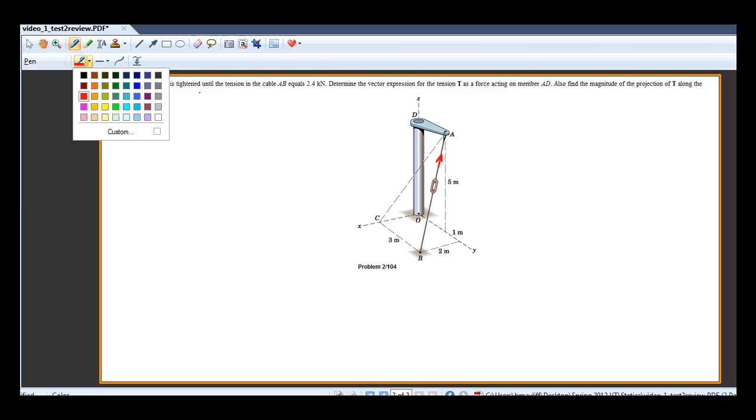This is my second video on statics. This is force systems and a three-dimensional problem. So we have tension is equal to 2.4 kilonewtons, and that is on AB. So I'll just add that in to the free-body diagram, sort of, there. And they want this tension as a vector expression. So that means they want it in I, J, and K.

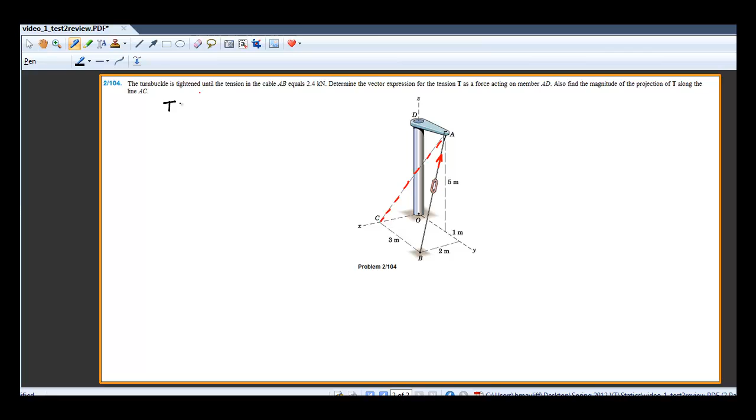And they also want the projection of T along the line AC. So they want it right along here. So they want you to project it across that. So how do we do this? Well, in the last video, we said that tension, or the force, is equal to the force times the unit vector. And the unit vector in this case is going to be from A to B or B to A. Depends on which direction the tension's going in.

So I probably did that wrong, but it doesn't really make a difference. So we start out with the x. So the unit vector is equal to 2 in the x. So that's 2I. And that's going to be 1 because it goes across 1 here. And that's going to be plus, actually minus, these are both going to be minus. That's going to be minus J, and then it's going to be plus 5K. And you can see that because the tension is going up in this direction, which means it's going to be going a negative x, a negative y, and a positive k.

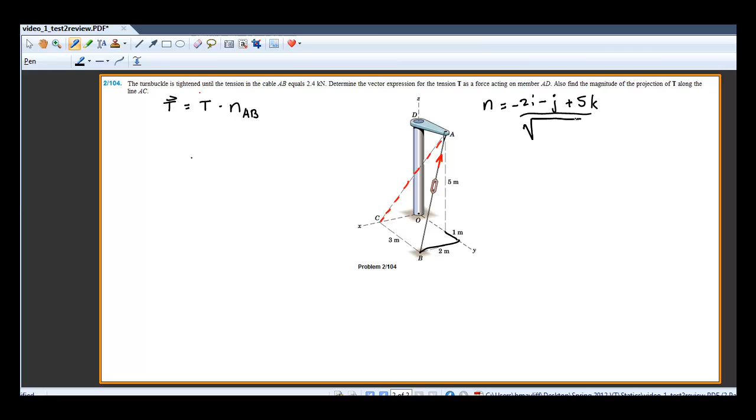And then we do that all over the square root of each of them squared. So just 4 plus 1 plus 25. So that's what this gives us for the unit vector from A to B or B to A. And then to get the tension in terms of I, J, and K, we simply have the tension is equal to 2.4 times negative 0.365 I minus 0.183 J plus 0.913 K.

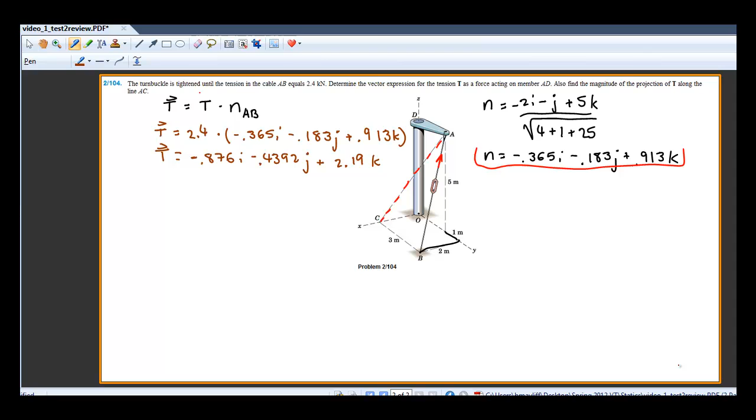Okay, so let's just look at this in review. And it seems like I made a little mistake. It won't affect our numbers too greatly, but I'll make this blue. The tension should actually be facing down, because we are going from A to B, and therefore from point A to point B, it's going to be increasing along these values, so these should be positive, and then this should be negative. So the only way that's going to change our stuff is it's going to make this a positive, positive.

And I will try to get rid of that. Okay, that always seems to do that. I'll just, there we go. That's a negative.

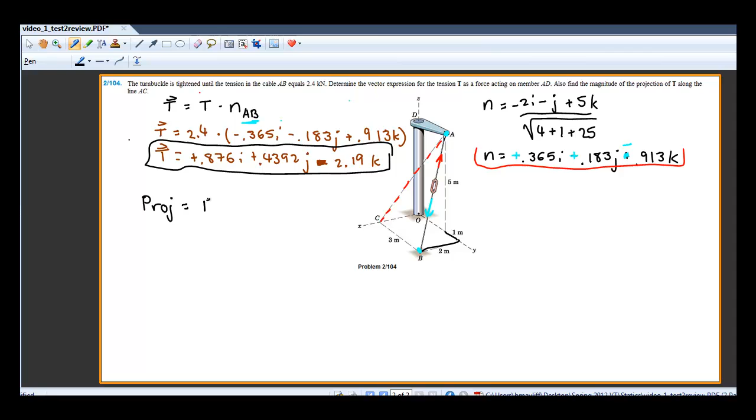Okay, so that's what we get. And that's the tension. And does that make sense why it should be like that? Because it's going from A to B and not from B to A. So how do we get the projection from AB to AC? Well, we will take the projection. So we'll have projection is equal to the vector tension, and we're going to dot product it by the unit vector from A to C.

And the unit vector from A to C, which would be n_AC, is going from A to C, which means it's going to be a negative value. So that's going to be negative 2, oh, actually, that's J. For the x, it'll be positive. It will be 2I minus 2J minus 5K. And then that's all going to be over the square root of 4 plus 4 plus 25. And I'll just quickly compute that out. Okay, and that's what we have for the unit vector from A to C.

And then we simply just have to multiply it out. So we have projection equals 0.876i plus 0.4392j minus 2.19k, dot 0.348i minus 0.348j minus 0.87k. So the scalar projection is 2.06 kilonewtons. And that's how you solve the problem.

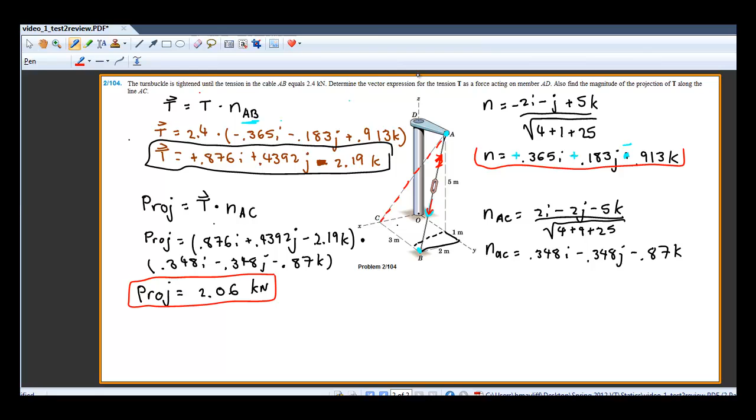So let's just quickly review what we just did. We started out with the turnbuckle being tightened, and it's causing a tension, and that would be going down, like that. And essentially we need to break it down into a vector, which is just I, J, and K. So in order to do that, we multiply it by a unit vector, which I will just go over with the highlighter. So you have to do the unit vector, which is this, and that comes from over here.

And then from there, after we found the tension in a vector, which is this guy here, then we plug it in here, and we need to multiply it. For the projection, we take the tension of the cable going across here, dot product by the unit vector of AC, which is there, and then that unit vector is this value here.

Well, that's how you solve it. And then you just multiply them out, and that will give you your final answer, which is there.

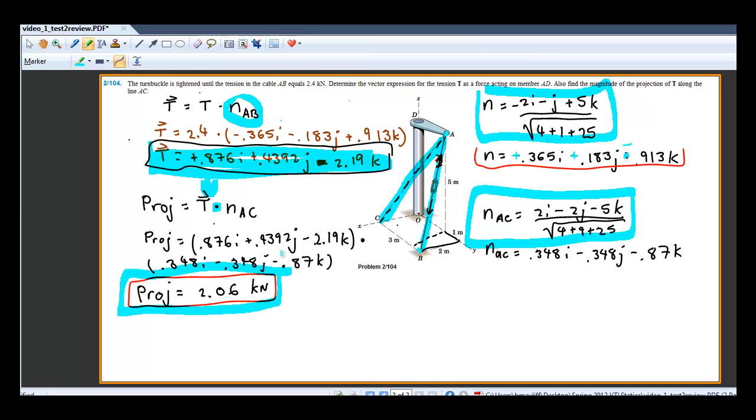There we go. So, sorry about that. It's the finicky touchscreen laptop.

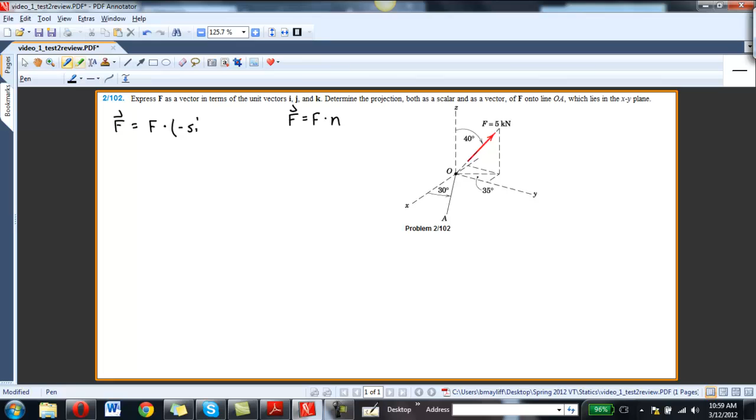Okay, so we start out with x, so it's going to be in the negative direction, so it's going to be negative, what's that, sine 35? Oh, tricky. Actually, you notice here, that would be if we had the force going across the bottom here. So we'll first have to find this F, which we'll call Fxy, and that's going to be equal to the cosine of 50, because we know that this angle here is 50.

So cosine 50 times F. And Fz is going to be F sine 50. And then we split the Fxy into x and y components again. So that's just going to be from this line here. So the x component, I'll write it in red here. X is going to be like this, and the y, being blue, is going to be like this.

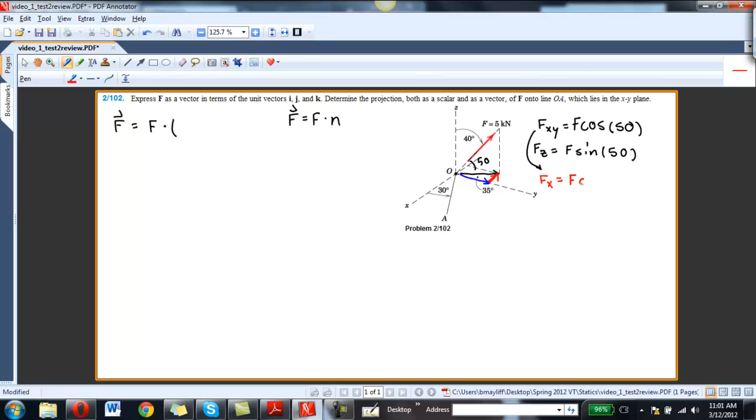So, keeping up with the whole red theme, Fx is equal to F cosine 50 times sine 35. And in blue we have Fy, and that's going to be equal to F cosine 50 cosine 35. And these are actually both going to be negative, but we won't worry about that right now.

I'm getting a phone call. Sorry about that. Okay, sorry about that.

So we have F of x, which would be negative cosine 50 sine 35, and that's an i. And let's see, j would also be negative, so negative cosine 50 cosine 35. This is running on a little bit. And then that's going to be positive, so plus sine 50 k.

Okay, there we go. That sort of ran on a little bit, but it shouldn't be too difficult to solve, seeing as F is 5 kilonewtons. So, just plugging in the numbers, I'll just do that quickly. And whoops, a little mistake there: actually the y's are going to be positive. Just remember that. So this is what we get for the F in terms of the unit vectors.

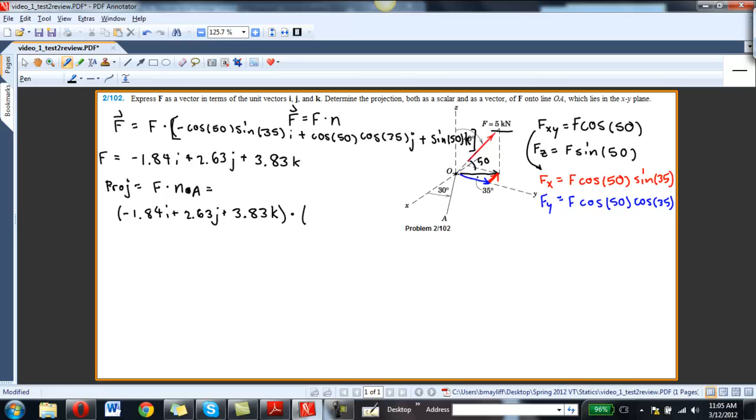and that's going to be dot. Now for this, all we have to do is say that A is going to be in the xy, which means there's 0 k. So for the x it is going to be cosine 30, and for the y it's going to be sine 30. Again, sorry about that. And I'll just quickly multiply that out. And that is what we get there. And this is just the magnitude, as I said before, the scalar.

So to convert it into a vector, we simply just say F OA, or projection, or whatever. And that is going to be this times the unit vector, which is just going to be the same exact thing. So we're just going to have negative 0.278 times cosine 30 i plus sine 30 j, and that will give us that. Just multiplying it out, and that's basically how we solve it.

So the key things to remember are, for F as a vector in i, j, and k, you just multiply it by a unit vector. The unit vector is just the distances or the angles, whatever you want to think of it. And then for projection, you just multiply it by the unit vector of the line that you want to project it onto. And that's pretty much it.